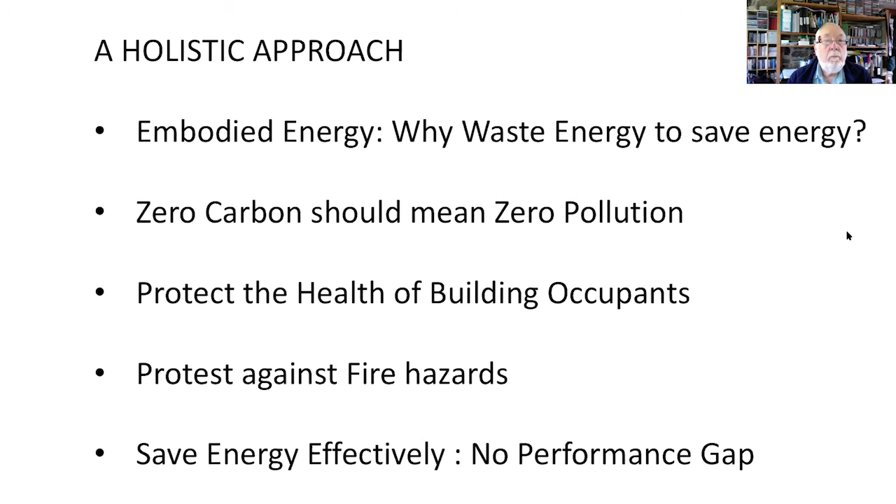So I've been doing an analysis of recent reports written in the last 4 or 5 years about zero carbon, net zero. I think I've worked my way through 50 reports now about this issue. And one of the things I find very depressing about this is that they're all essentially aspirational. So they tell us over and over again, we have to decarbonize, we have to move to net zero, we have to achieve zero carbon, but very few of them actually say how that can be done.

And one way you can check this is by looking at the subject of insulation. If we want to save carbon, we should insulate our buildings better, but most of these documents barely touch on the topic of insulation.

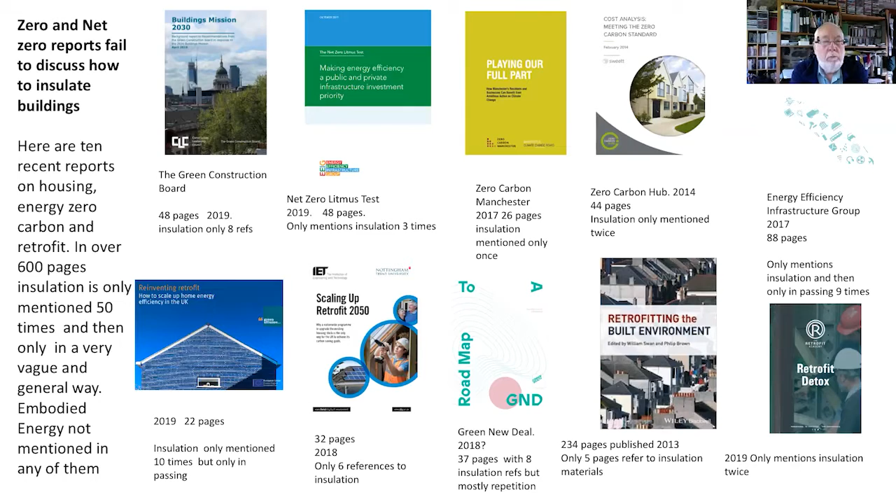Some of them don't mention it at all. The UK Green Building Council report on zero carbon, for instance, which I don't think is on this particular slide, doesn't mention insulation at all. And many of these documents mention insulation, but only in passing, like insulation is a good thing, but they don't say what kind of insulation or how it should be applied. So it's a worry that all these documents are being produced without people really saying what they're going to do about it.

Fortunately, there's the start of some better proposals coming up, and this is a particularly good document which I've come across recently by EASAC. It's a European policy report, and it actually does go into more detail about what needs to be done to achieve decarbonisation. So they get a gold star from me for doing that. They could have gone a lot further, of course, but there's a quotation here, which is about the bio-based insulation materials have much lower levels of embodied emissions. So that is really great.

None of the other documents, and particularly documents being produced by organisations in the UK, actually refer to this sort of thing at all. And the document really goes into a great deal of detail about the importance of embodied energy reduction. So I would strongly recommend reading this document if you can find it on the internet.

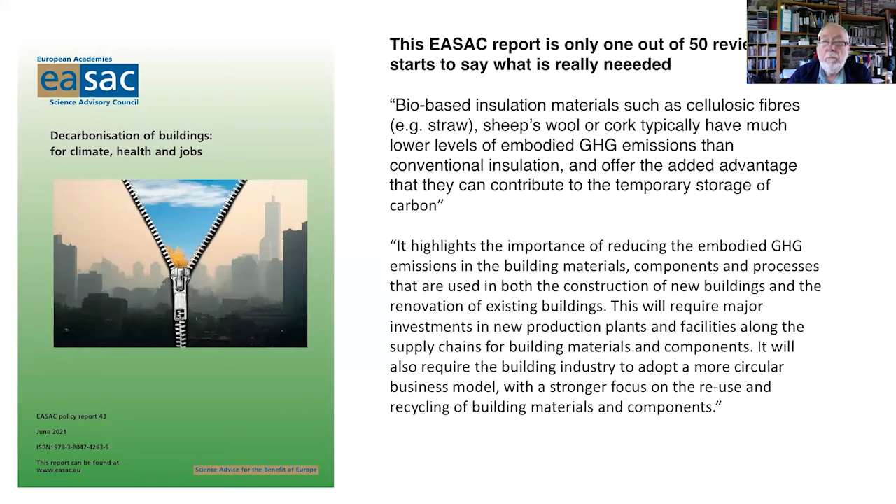An example of a UK document is from the Construction Leadership Council on greening our existing homes. In fact, it says absolutely nothing, in my view, about greening homes. Insulation is only mentioned 8 times, and in fact 4 of those mentions are about a somewhat questionable retrofit scheme. They do advocate what's called deep retrofit, and there's a thing called Energiesprong, but this is a luxury solution using high embodied energy materials. It's far too expensive and only relevant to a handful of buildings. So there aren't any green solutions, in my view, in this document, and that's fairly typical of the approach which is being adopted here.

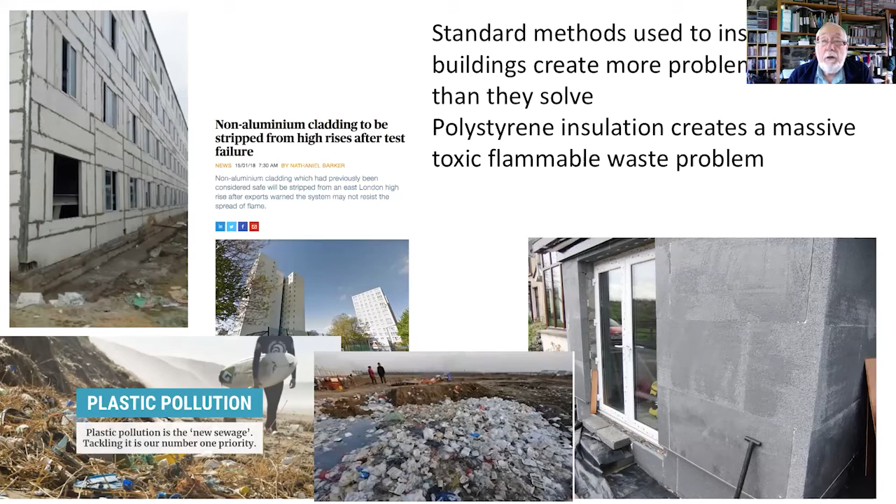One of the problems we've got is that most conventional approaches to decarbonisation and insulating buildings advocate the use of plastic, foam, petrochemical based insulation materials. So these materials have embodied energy which is too high, they're flammable, they're toxic, and they create a serious amount of plastic pollution and waste. Polystyrene is one of the biggest contributors to waste in the oceans, and yet we're still continuing to use it widely on buildings. For instance, the use of polystyrene beads in cavity wall insulation, which I would not advocate at all as a good solution to making buildings more energy efficient, creates serious problems, and microplastics and beads are a particular problem in the oceans, and this really shouldn't be allowed at all, actually, but it's one of the main things which is advocated by government policy.

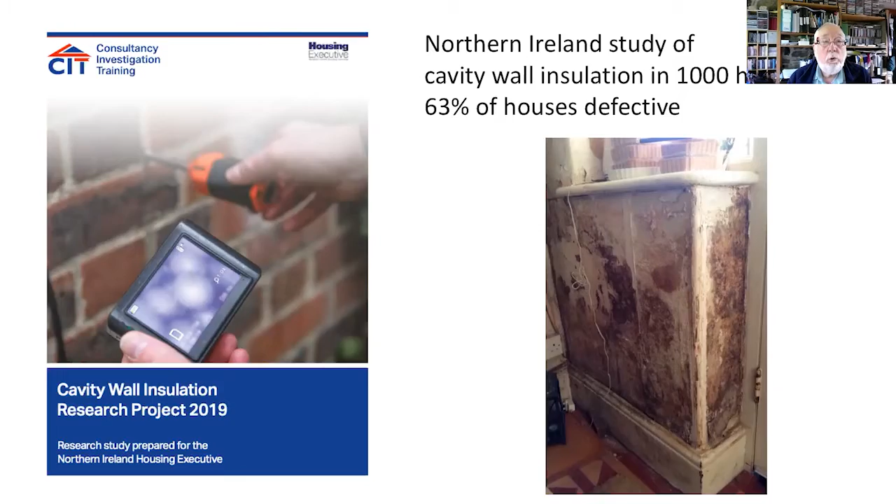A recent study that I was involved in to some extent in Northern Ireland by the Northern Ireland Housing Executive looked at nearly 1,000 houses that had received cavity wall insulation, and they found that 63% of these houses were defective. So it isn't even a particularly effective way of insulating buildings. And one of the problems we've got in the UK now is a massive problem with mold and damp in buildings as a result of retrofit disasters. These are the result of using non-breathable plastic materials in cavities and on the outside of and inside of walls of buildings.

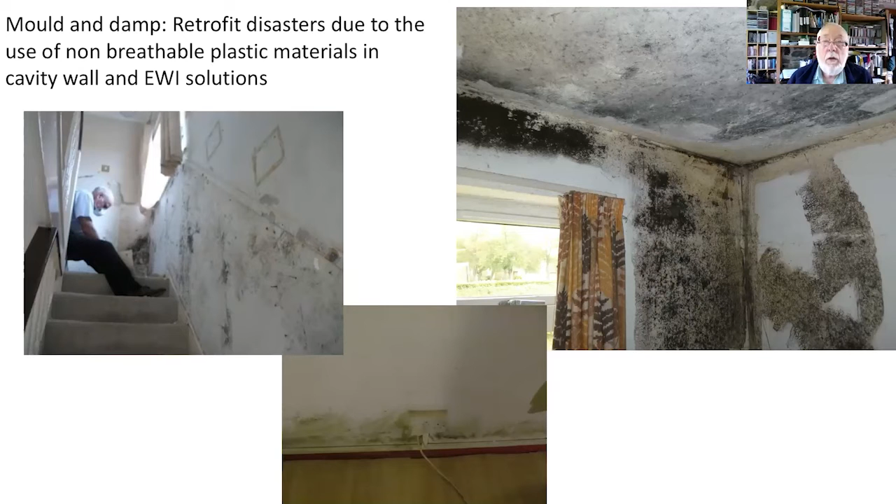This has become known as the Great Retrofit Disaster, but a lot of people still have their heads in the sand about this issue, and not a lot is being done about tackling the problem, because people's lives have been turned into misery as a result of botched insulation schemes. The latest UK government scheme for green homes has been a complete washout, really, and very heavily attacked by MPs in Parliament for its inadequacies, and the government doesn't seem to learn from these mistakes.

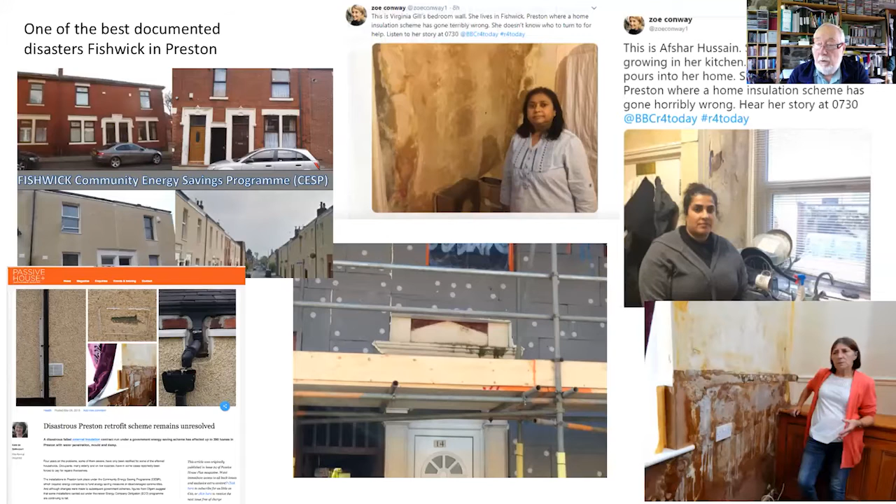Perhaps the best known disaster scheme, but only one of many, is at Fishwick in Preston, which has been very well publicised, where people have had their houses renovated with external wall insulation, only to leave them with serious problems of damp and problems inside their houses. I'm happy to come back to this if you have any questions about it.

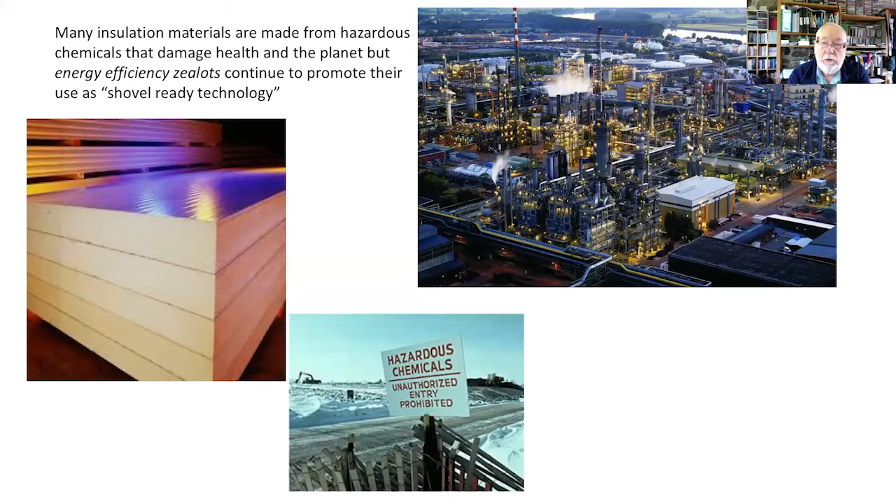In fact, the pollution problems are so bad that most of the production of the materials used to create these insulations, like isocyanates, has stopped in Europe and has moved to China. And as a result of that, we then have got CFC emissions coming from these production processes in China, which has been widely publicized in journals like Nature. CFCs were banned by the Montreal Protocol in 1992, but they're still being used as blowing agents in insulation manufacture.

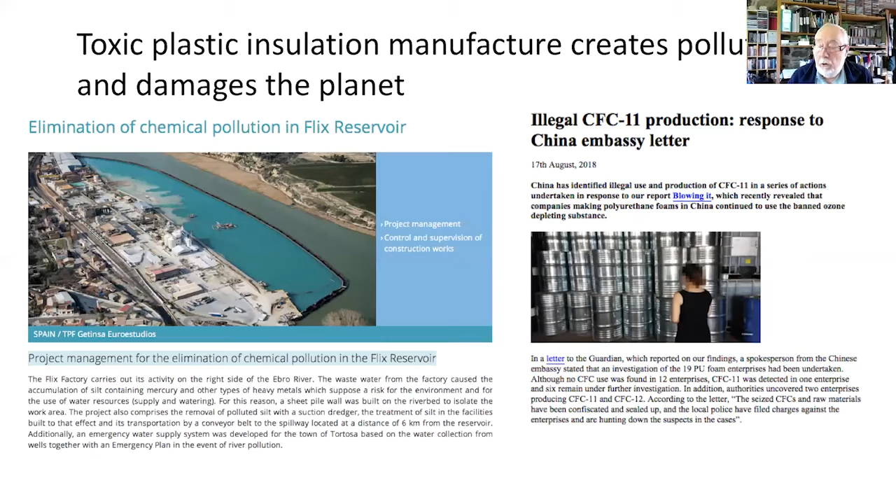The other big problem with these petrochemical materials is that of fires, and the numbers of fires in buildings are increasing. The government's just published its health and safety bill in Parliament, but this is largely focusing on the problem of buildings over 18 meters high, whereas in fact the majority of fires are in buildings underneath that. And it's increasing because of the use of flammable materials in housing.

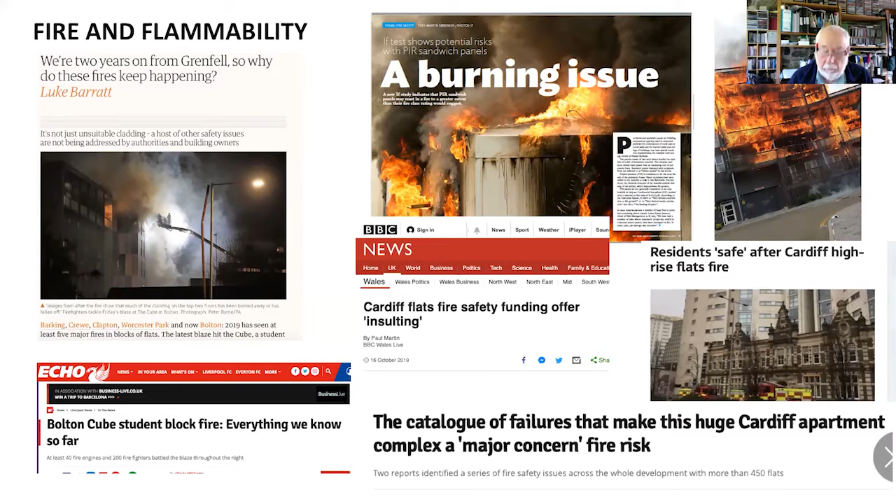The Grenfell disaster has obviously made many people more aware of these issues, but I still think there's a lot of confusion and misunderstanding about the problems. Grenfell United have been particularly active going after some of the big insulation manufacturers that produce petrochemical insulation materials, and the Grenfell inquiry has exposed terrible problems with the bad state of certification and approval of these kinds of materials, which have allowed dangerous, polluting, flammable materials to be put into buildings, and they continue to be used.

Another major problem that we've got is of increased air tightness. It's assumed that in order to make buildings more energy efficient, we have to make them more airtight. That means wrapping them in plastic, which in my view is not the way to go. And there's a particularly interesting project run in Glasgow called the HEMAC project, Health Effects of Modern Airtight Construction, which has led to a number of documents and reports about the problems of this. Wrapping everything in plastics is not the way to go.

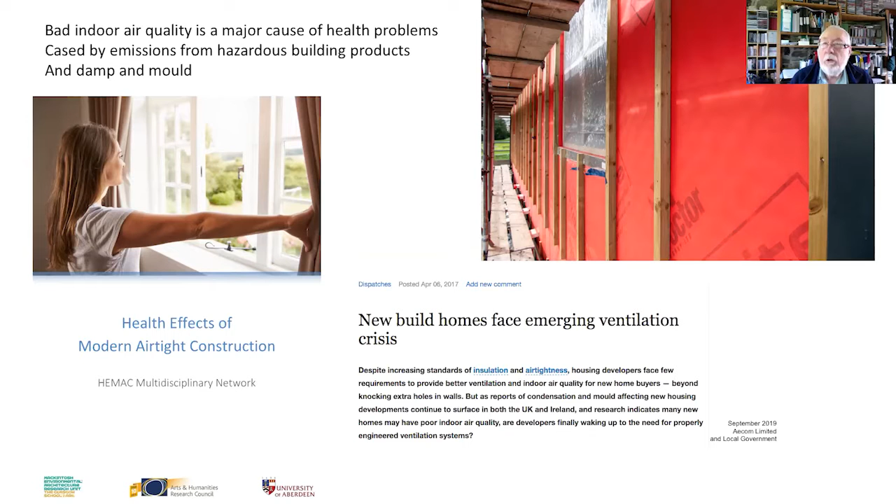The effect on people's health from indoor air quality is now being generally accepted to be more serious than that of external air quality. And lots of people have produced reports about this. The Royal College of Pediatrics and Child Health report, the British Lung Foundation has been publishing stuff, and the IAQM has recently issued a consultation draft on indoor air quality guidance. So this is a really important issue, but it's very underdeveloped in the UK in particular.

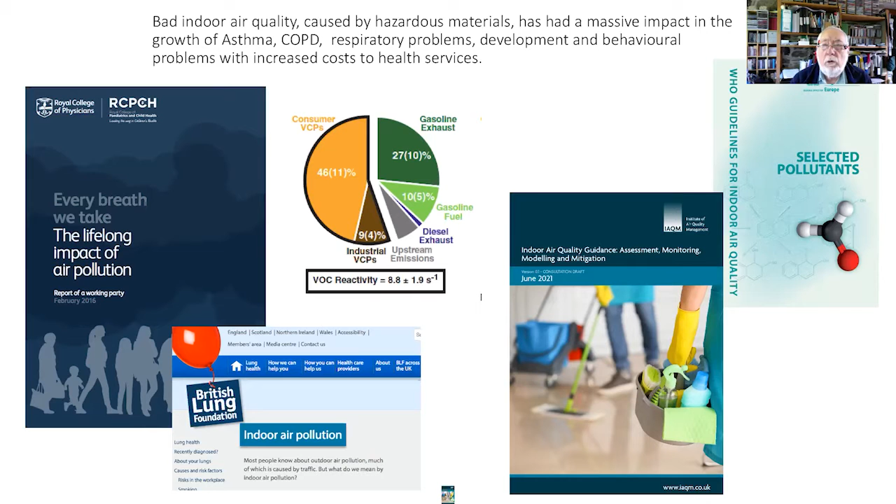As architects, we can test for indoor air quality now. It's something we try to do. We use a relatively affordable way of sampling air from a company called PRISM Analytical. And one of the things that I've discovered when we do this is that the emissions from volatile organic compounds and from formaldehyde tend to be over safe limits in almost every building that we test, including brand new housing.

This house that you can see on the slide here not only had high levels of these chemicals, which were a result of the building materials in the building, not the tenants. The tenants had only just moved into the house, and it also had serious problems of mold growth as well. It was a brand new house, quite a nice house as well, but it came already equipped with these toxic chemicals and health problematic materials. So this is something that we need to make people more aware of.

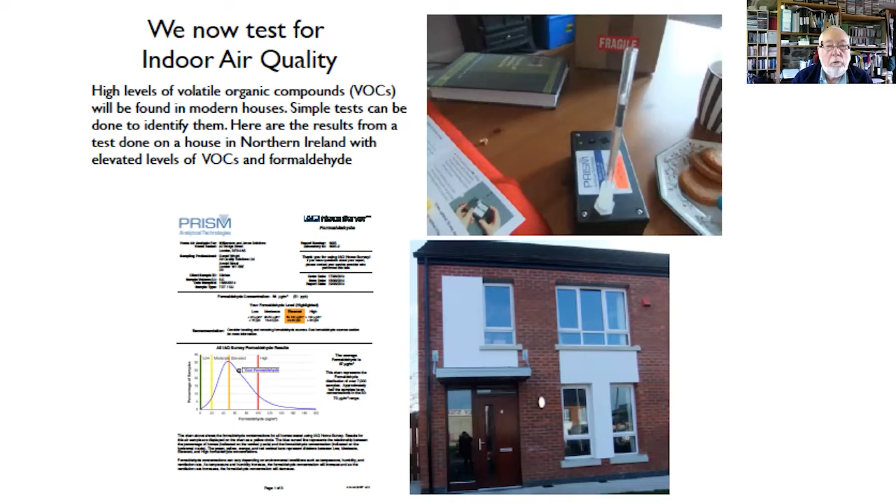So what do you do about that? Well, we try now as architects to build with natural, non-toxic, breathable materials, and to try and reduce the use of petrochemical products as much as possible. But one of the big problems we've got with this is that the eco materials like wood fiber, you can see the use of wood fiber insulation and also cork on this slide. These are coming from the rest of Europe. They're not manufactured in the UK.

Cork, obviously not, because we don't have cork trees in the UK, but wood fiber we could easily produce in the UK. We dump hundreds of thousands of tons of wood waste into landfill every year, whereas it could actually be made into wood fiber insulation. But obviously importing it from Europe increases the costs and leads to other problems as well. So this is something that has to change.

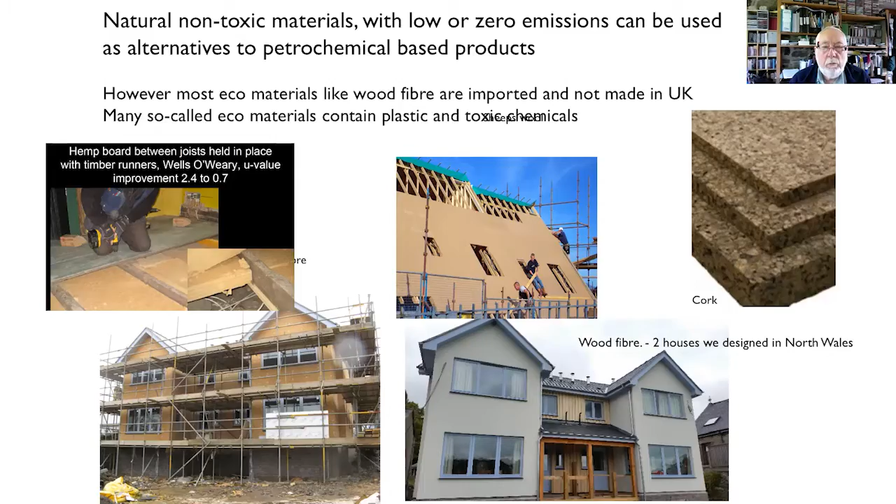I know that the UK government is aware of the importance of bio-based materials, but they're not doing anything about supporting industry to develop these products. The material which we use most of all is hempcrete, and we produced a guide to hempcrete back in 2008, which was published by the BRE Press, and hempcrete has been widely used throughout the UK.

This is a way of casting solid walls of a building by mixing hemp with lime, usually in conjunction with a timber frame. You can see that on the bottom left. And this is a method for both new building and also for renovation. So on the right, you can see a wall which has got hempcrete on it, which is only 50 mil, 2 inches thick. But normally when you're building new, you're building walls about 300, 350 mil thick. And there's a very good guide to hempcrete construction produced by Stanwix and Sparrow, published by Green Books.

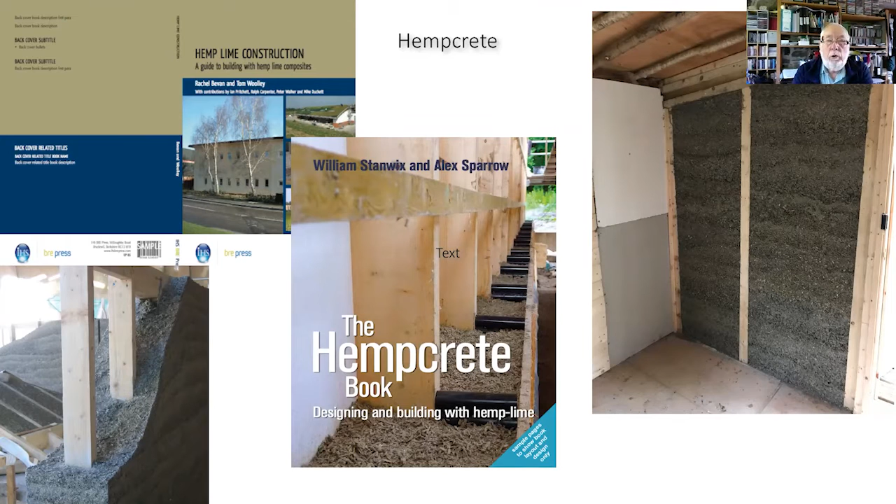Hemp houses have been around for 30 years now. I'm quite often told by people, particularly Green New Deal campaigners, that they want to use shovel-ready technology. They tell me that we can't wait for you to produce these innovative natural insulation materials. Well, that's nonsense, because we've been using these materials for 30 years and they're well tried and tested and ready to go. So it's a kind of false argument. Here, these houses were built by a housing association in Haverhill, and the hempcrete houses perform better than the two adjoining houses built out of brick and mineral wool insulation.

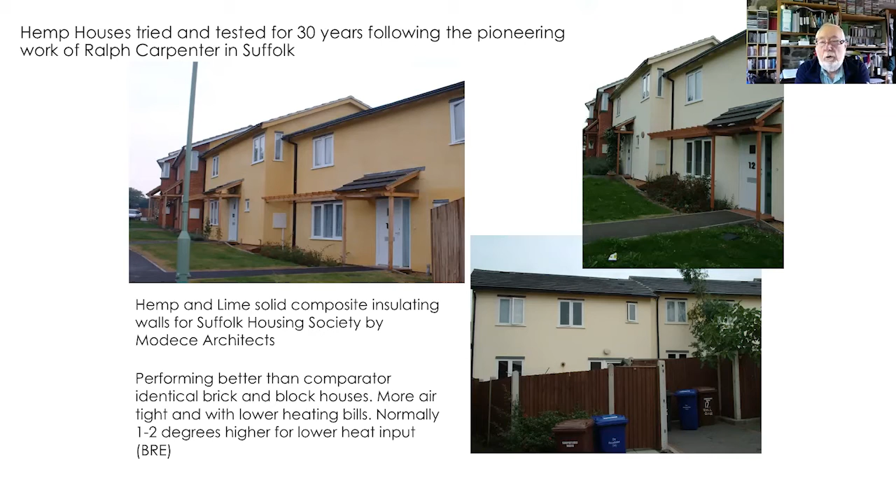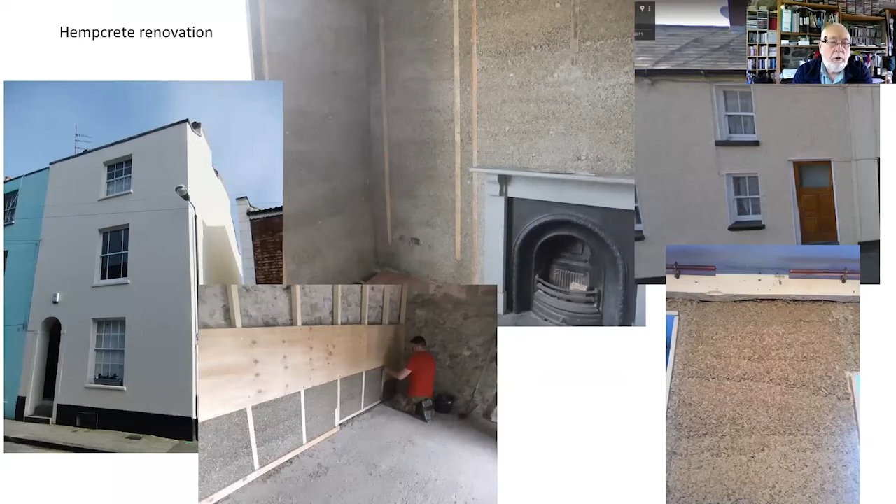It's possible to install hempcrete in many ways. You can cast it, you can spray it, you can turn it into blocks. Blocks are not the most efficient way to use the material. And so it's particularly valuable and is used a great deal in the renovation of historic buildings, as you can see here. Here it's being used to renovate, well, I'm not sure if it's listed, but certainly in a conservation area in Bristol. And the conservation officers seem to be very supportive of the use of hempcrete, where it's been used to replace the old lath and plaster. And there's also an old cottage here in Ireland that's been renovated using hempcrete. So we've applied this material in many ways very successfully.

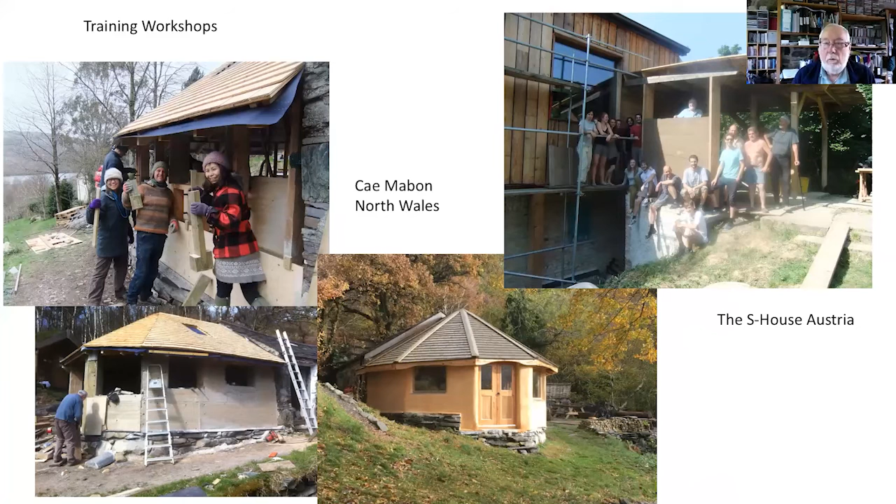Here's some other examples. A small building that was built at Cae Mabon in North Wales using hempcrete, again with volunteers who had no previous experience of using hempcrete. And then a project in Austria at the S House, where we've been spreading the idea of hempcrete to many other countries. One of the projects I'm most proud of is the Rediscovery Centre in Ballymun in Dublin. This is an environmental education and recycling centre. It's also the Irish Centre for the Circular Economy. And here we were able to convert an old boiler house. So we reused much of the steel structure of the building, and then the walls were all cast out of hempcrete. So the building is very, very energy efficient and demonstrates all sorts of other innovative technologies as well.

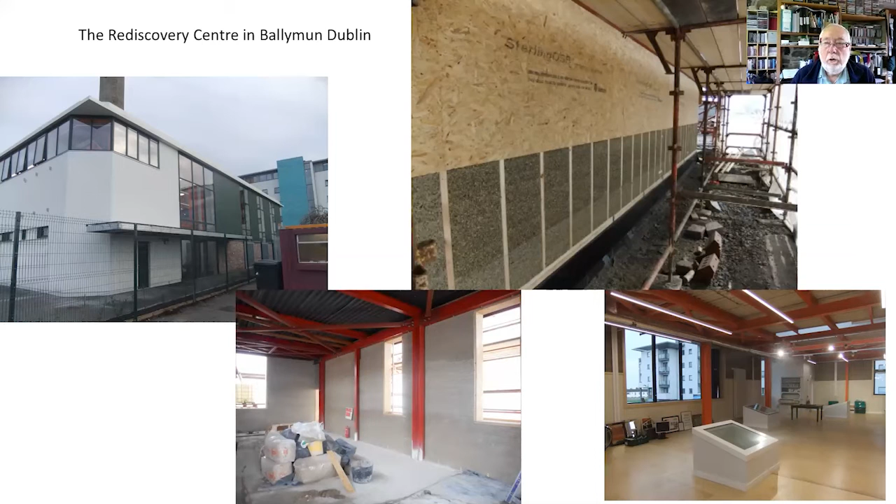We built a hempcrete cottage in our own garden, which we've been able to monitor over a long period now. We put our own money into this project so that we could be sure that we were happy with the technology. And this is recently being monitored by University of Ulster to look at the humidity controlling benefits of using hempcrete, which are a particularly strong feature of this material, as well as the building being very, very energy efficient.

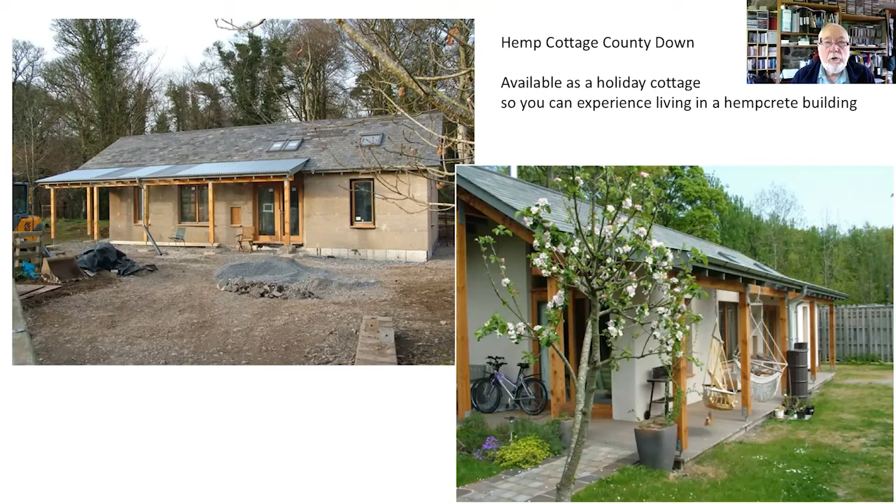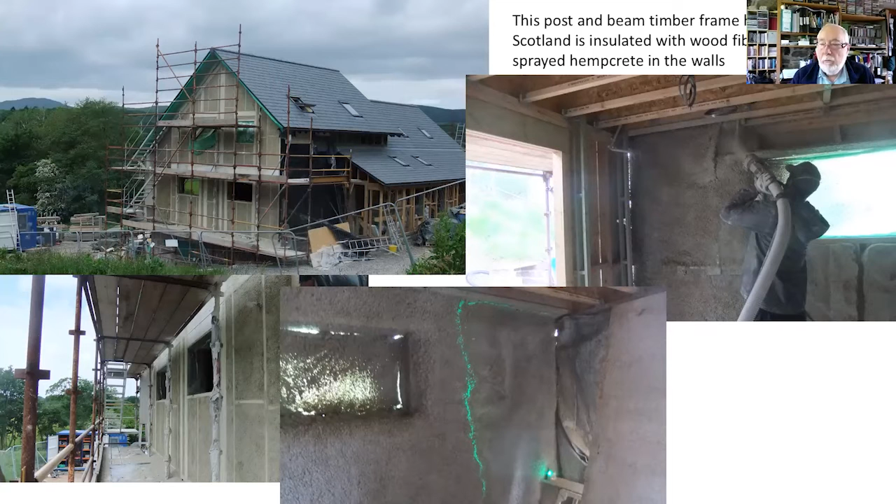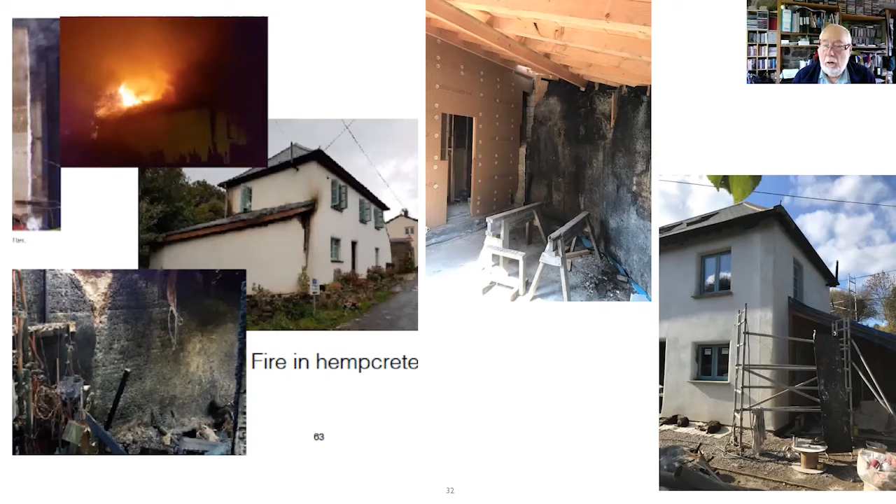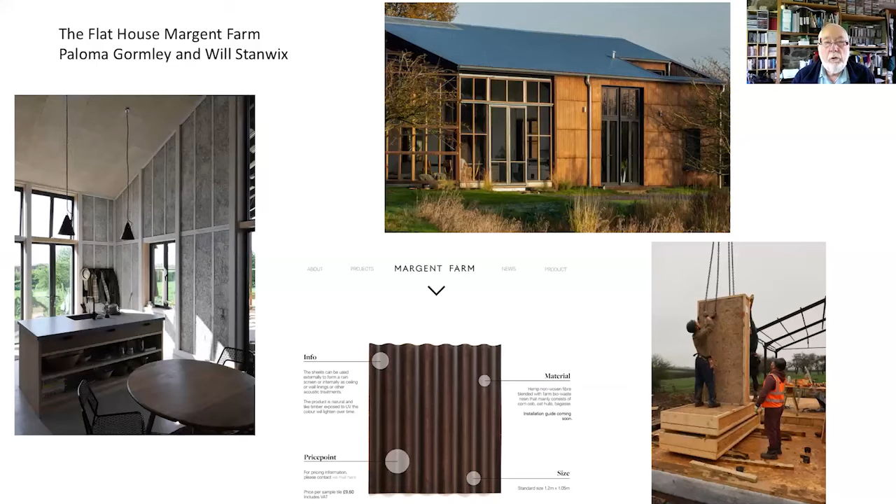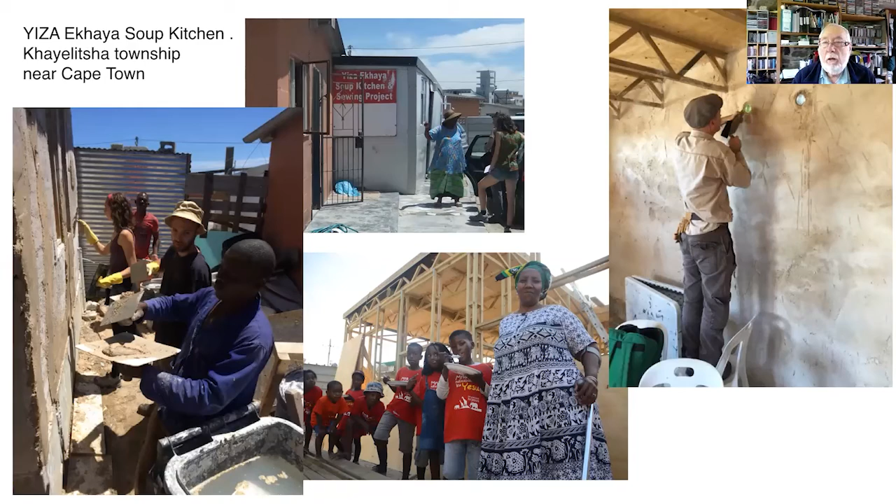We've done other projects around the world. This is a soup kitchen in Khayelitsha Township in Cape Town, which is built with hempcrete called YIZA Ekhaya. And you can see some wonderful films on YouTube of the kids helping to build this building. And we did a project in Chile in a particularly earthquake-prone area. So we'll be able to see how the hempcrete stands up to the earthquake problem.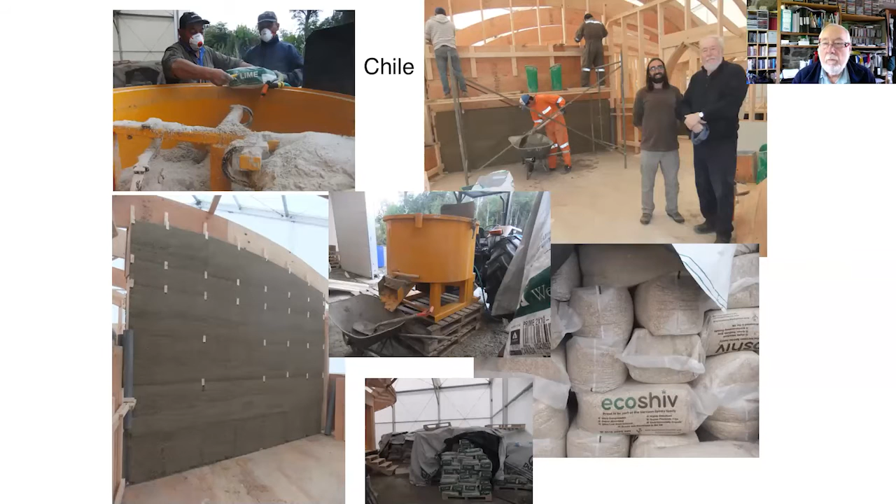In this case, I had to teach local builders who'd never done hempcrete before how to do hempcrete, and they got it within about half a day, to be quite honest, and I was able to stand back and relax. Even though I couldn't speak any Spanish and they couldn't speak any English, they got it really quickly. It's a very, very simple and easy method to build with. There's lots of other buildings around Europe, multi-story housing built out of hempcrete. It has fantastic potential in that respect.

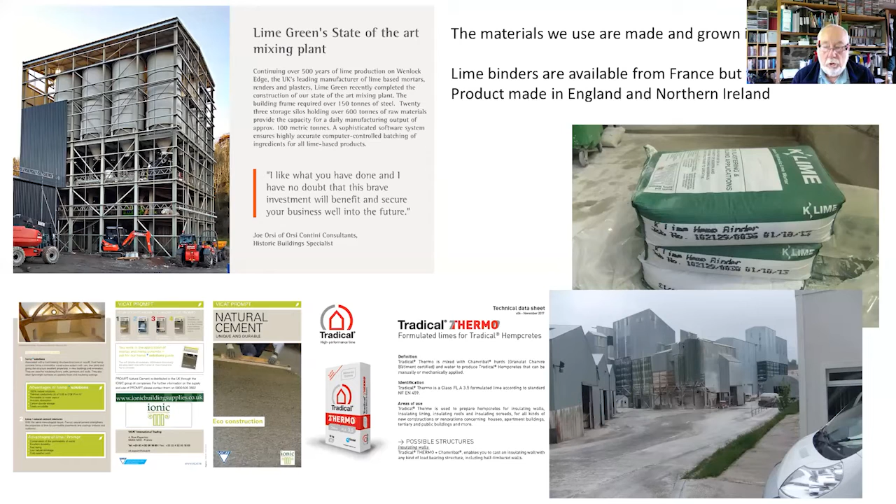And we use materials which are manufactured in the UK. So we get our lime binder from Kilwaughter Lime in Northern Ireland and from Lime Green in Shropshire. There are French products, but we prefer to use the ones that are manufactured here. And the hemp comes from a company in Yorkshire called Harrison Spinks. Harrison Spinks make mattresses from natural wool and hemp, but they have a lot of hemp material left over, which we can use for building. So it's a very nice company to deal with. And again, it means that we've got the materials that are grown and produced locally.

We have some certification for this. We have LABSS certification for hempcrete in Scotland, and hopefully before long we'll have LABC certification in England. And there are data sheets and so on. Some people are very skeptical about using materials if they don't have this kind of certification, and we need to do more work on this.